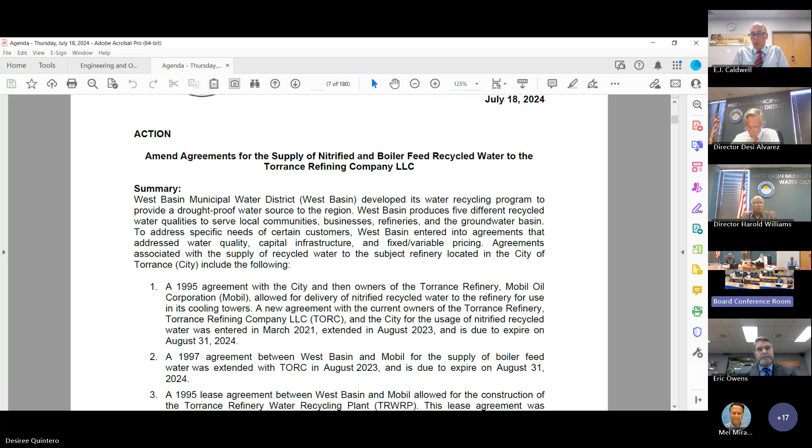So then we will move on to our second item on the action calendar, which is the amendment to the agreements for the supply of nitrified and boiler feed recycled water to the Torrance Refining Company. Mr. General Manager. Yes, thank you very much, Mr. Chairman. This item does begin on packet page 7. As you just mentioned, it is related to the nitrified and boiler feed recycled water agreements with the Torrance Refining Company. And for this presentation, we do have Mark Messerlian, our Executive Manager of Engineering and Operations.

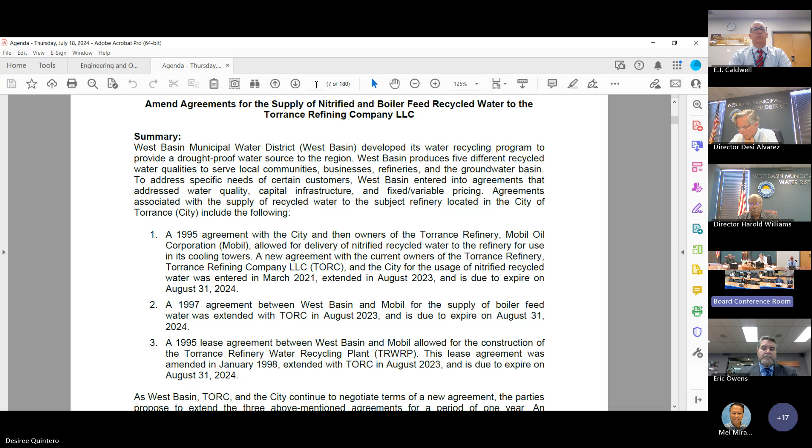Thank you, EJ. Good afternoon, directors. The development of West Basin's recycled water program required West Basin to enter into agreements with its refinery customers. Such agreements address water quality, capital expenditure, fixed and variable pricing. The agreements associated with our supply of recycled water to the Torrance Refinery are summarized on packet page 7, on the first page of the memo, under the summary. First, we have...

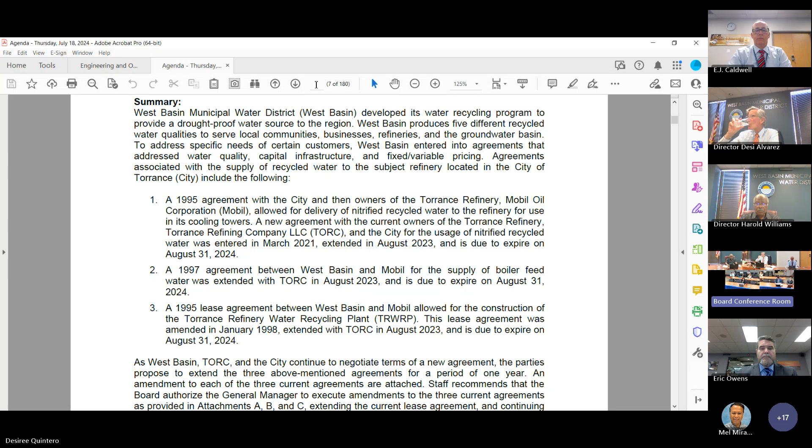the original agreement of 1995 for the supply of nitrified recycled water to the Torrance Refinery. That agreement ended in 2020. We entered into a new agreement in March 2021 for the supply of recycled water, and that agreement was extended this time last year for a period of 12 months. Secondly, there's a 1997 agreement for the supply of boiler feed water. That agreement was extended again last year for a period of 12 months.

Third, a 1995 lease agreement that allowed West Basin to construct water treatment infrastructure on refinery land and allows us to operate that water treatment plant today. That 1995 lease agreement was amended in '98 to account for the boiler feed facilities, and then last year it was extended for a period of 12 months. So all three agreements were extended for a period of 12 months last year.

You may recall last year that the city at that time planned, and continues to plan, to add pricing provisions in any long-term agreement we might have, but they plan on doing so for any agreement that goes beyond August of next year, August 2025. And therefore, there is an understanding amongst the parties that another one-year extension agreement will be necessary to get us to that point, while it also gives us the opportunity to continue good faith negotiations with the parties on a new supply agreement that will allow full recovery of its supply costs.

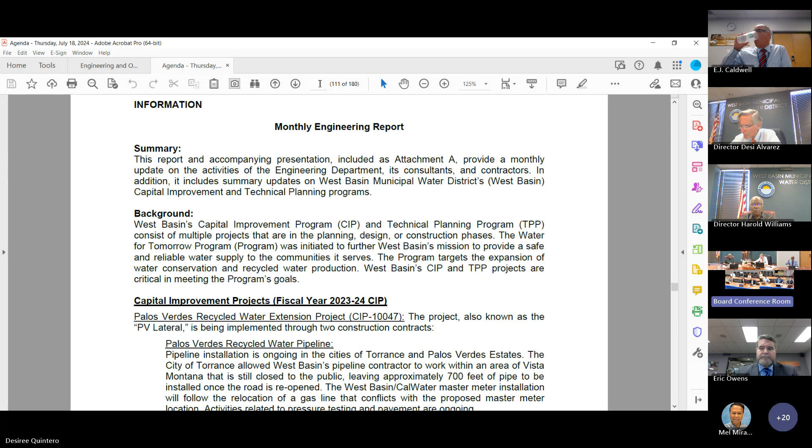As a reminder, at the end of the report in the agenda, you can also find project budget information and a list of open contracts for the engineering department, in case we ever have questions about those.

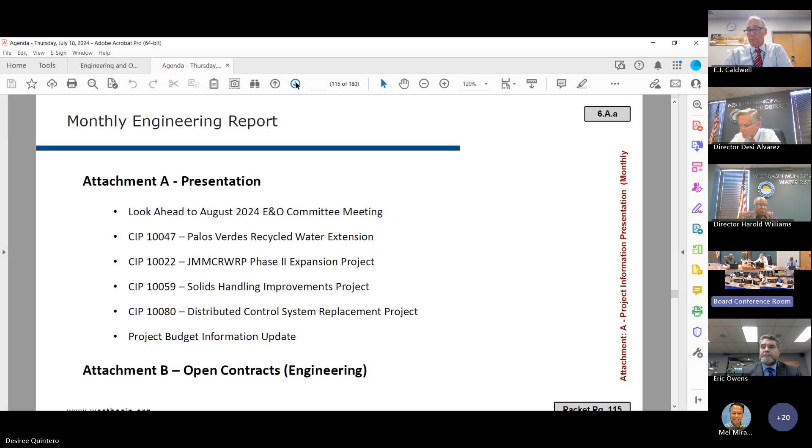This is a heads up on some items coming to committee from the engineering department. We anticipate requesting to pre-procure some key components of the solid handling facility improvement project, as well as requesting board approval to post the request for bids for the construction part of the project. John will talk more about this project.

In recent days, after we posted the agenda, we received word that another item could be coming next month. The city of Carson informed us that the agreement with the Carson Reclamation Authority for the new development just south of the 405 - the boulevards at South Bay, or the district at South Bay - a developer project that will install 5,000 feet of new recycled water piping, is moving along, and we could possibly bring it next month. I apologize it's not on the board, but it's recent news that it seems to be moving forward. Any questions about those? Otherwise we'll move along.

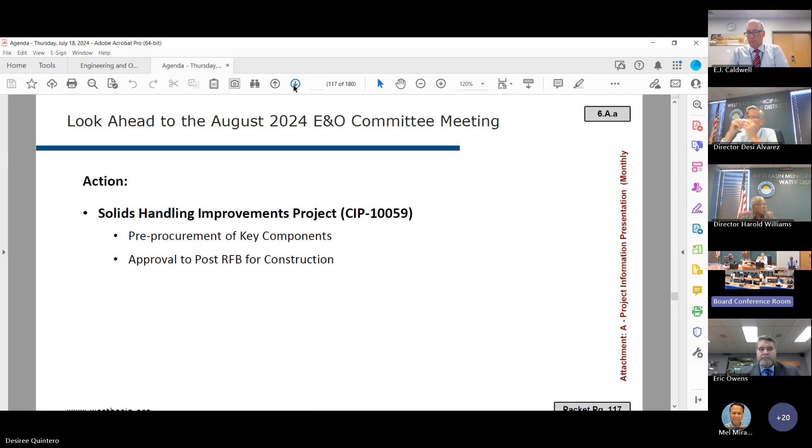Veronica, excuse me for interrupting, but could you speak up a little bit? Okay, yeah, I can do that for sure.

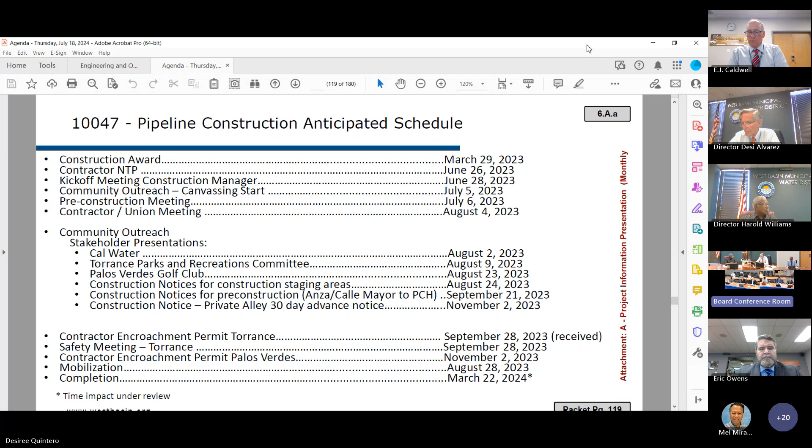So yes, we're in the process of assessing the submittals the contractor has sent us for the time extension. There's back and forth in regards to responses and modifications, so we're in the process of doing that. Hopefully next time we'll have a better, updated spreadsheet. But as you'll see on a future slide, we're almost done with the installation of the pipeline. If you can please follow me to the next page.

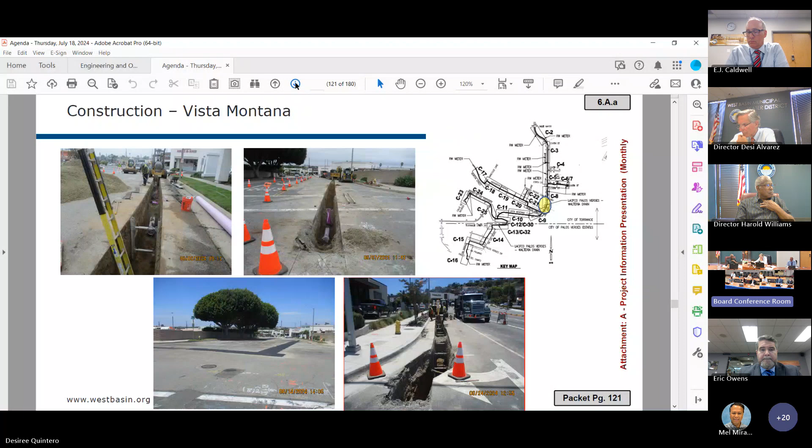Into the next page. This is a section that was actually closed by the city. Working with the city, they allowed us to work in the area where their contractor was working, and we were able to finish that area already. So this whole segment has been completed.

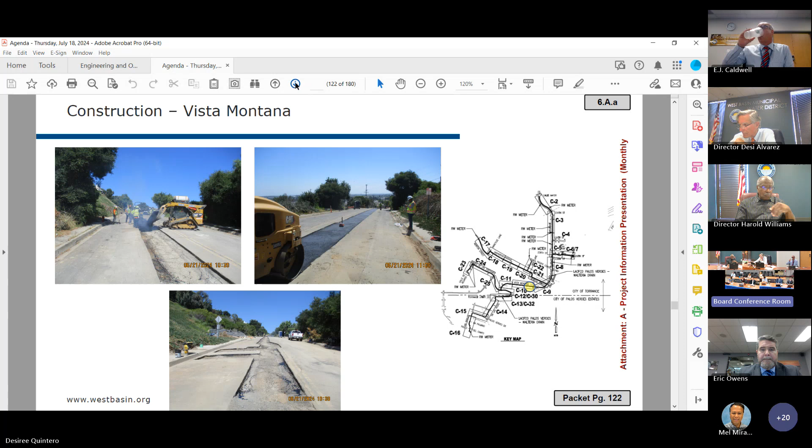The next page is just an illustration of the pipeline on the intake and discharge lines that are going into the pump station on 238th Street in the city of Torrance. Next page.

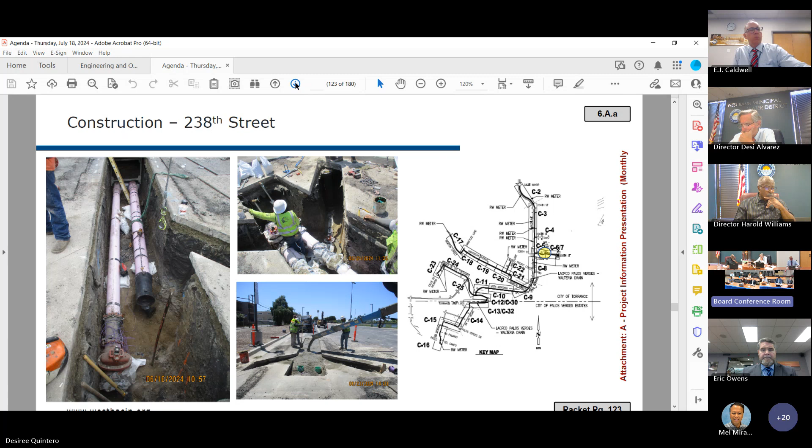So that's where the tie-in is going to take place. Right now we're coordinating with the operations department and the contractor to get the tie-in done in the upcoming couple of weeks, as well as another area on Vista Montana that the contractor is currently installing. By the next meeting, that whole pipeline alignment will essentially be completed.

The other component is the master meter that is in the process of being installed. As you might recall, we had a 2-inch gas line that had to be relocated, so we have to work our activities around that particular task. Right now there are also construction activities going into pressure testing, pavement, slurry seal, striping, and completeness punch list items. So this is for the pipeline installation.

Next page, please. This is the representation of the PLA status based on the pipeline. We are basically meeting goals. On the local, it says 18.8%, but that represents tier 1. Tier 1 is basically everything that is in the service area and a 25 radius from headquarters.

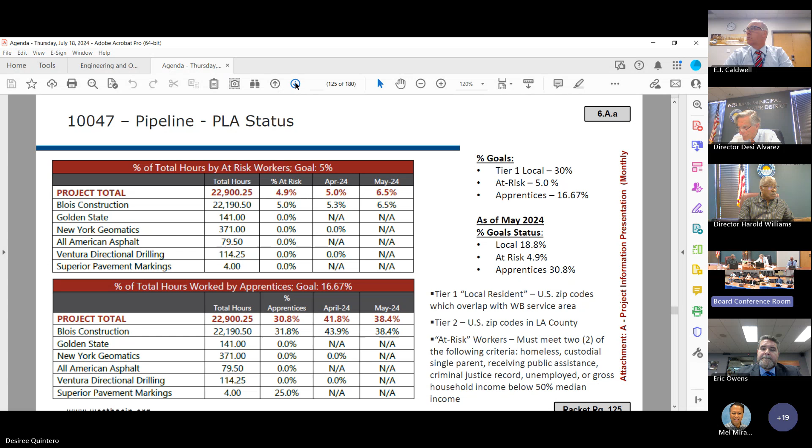Tier 2 is also local, but extends beyond the radius of the 25 miles. It's always known that it's sometimes challenging to meet all those criteria, but I think we are doing our best and we're meeting those criteria.

Into the next page. Again, this is just a summary of the local tier 1 and tier 2 per division, summarizing participation and all the contractors that are contributing to that. Next page.

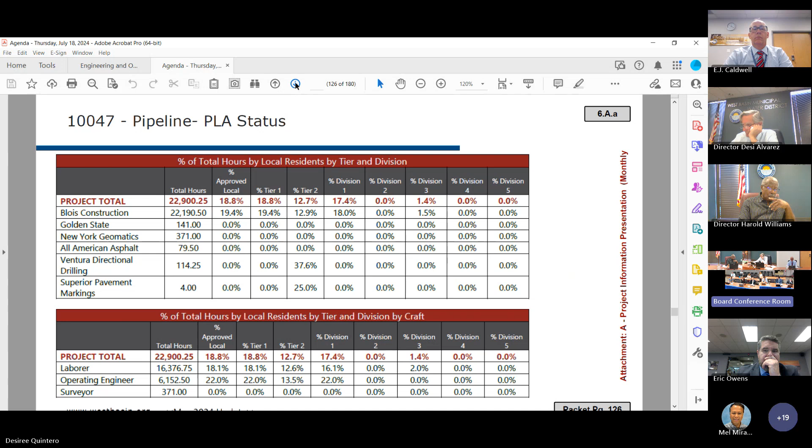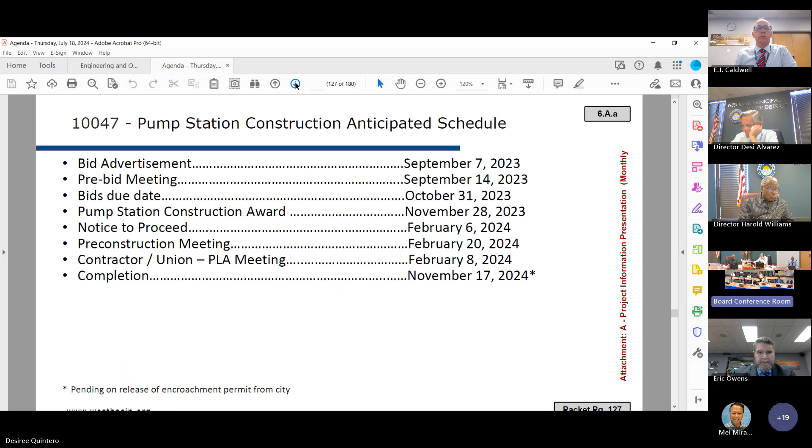So, pump station. Again, you've seen this particular slide, and we're happy to say that we finally got all the permits released, and they were picked up yesterday. Right now we're in the process of coordinating with the contractor for mobilization. This slide will probably be modified to represent dates with all the updates that we have.

Next page. Again, similar to the pipeline, this is just a summary of the activities that are ongoing. The submittals for those major long lead items have already been prioritized, so the contractor has already submitted those and they are in the process of procuring equipment.

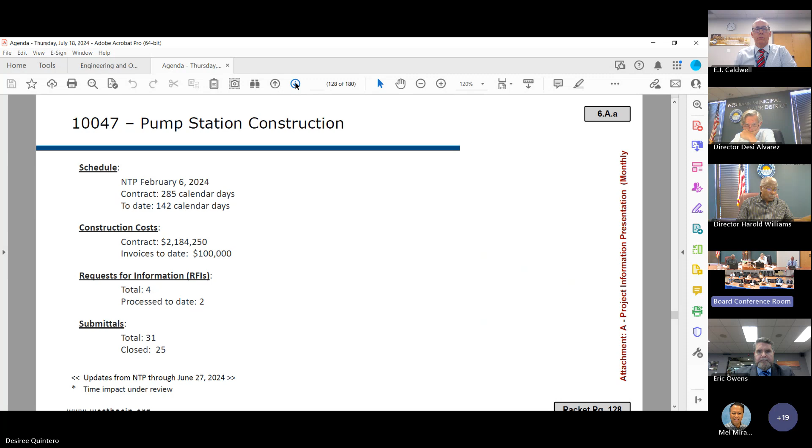Because there hasn't been much construction except for mobilization activities like bonding and setting up areas, there haven't been many invoices except for one. To next page.

Any questions? Not right now, thank you.

It's worth noting that we will be providing an update to the city of Palos Verdes Estates next week at the council meeting.

No, I have a question. Going back to the schedule. On the pipeline, we're 97 days over now. What is your best guesstimate of when it's going to be done?

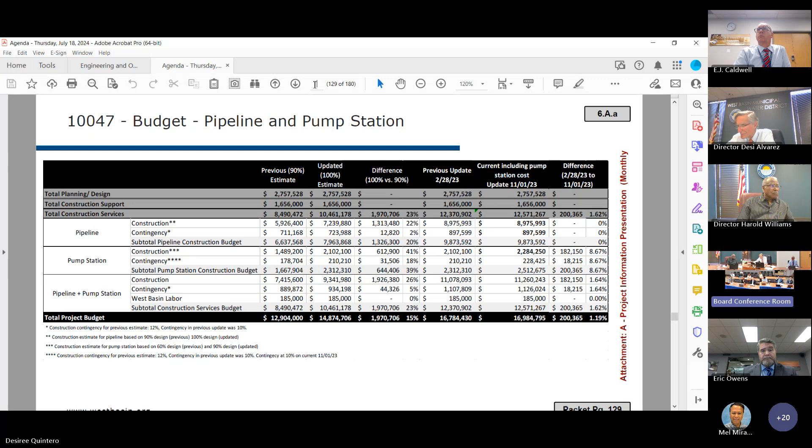Okay, let me see if I understood your question. You're asking when the pipeline is going to be finished? Yeah. Okay, so right now they're basically almost done with the installation of the pipeline, and then the remaining item will just be the master meter.

It seems like, by August, the end of August, they will basically be done. There might be some cleanup still, like follow-up, in September. The actual pipeline work will be finished in August, yes.

So another 45 days? So the pipeline right now, if maybe you can go back maybe 4 slides before, I think it's page, let's see. I hit 24. Yes, 124.

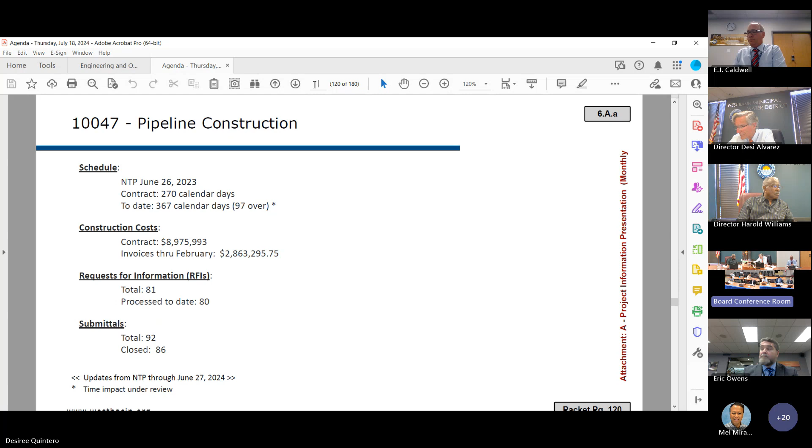Yes, they already have a couple of little areas. So in regards to pipeline installation, the only segment remaining is because the road was closed and the contractor had to wait for the city to open Montana Avenue.

The other segment in the process of being installed is just the tie-in. The pipeline is already installed. All they have to do is basically do the connection from the new pipeline to the existing recycled water system, which is at Anza and Calle Mayor. For that, the contractor has already pressure tested the segment between Calle Mayor and the pump station, all the way to the intake, and that has already been tested and passed.

So the contractor is planning on that tie-in in the next couple of weeks. That's what we're coordinating, and again, that will be completed by next week.

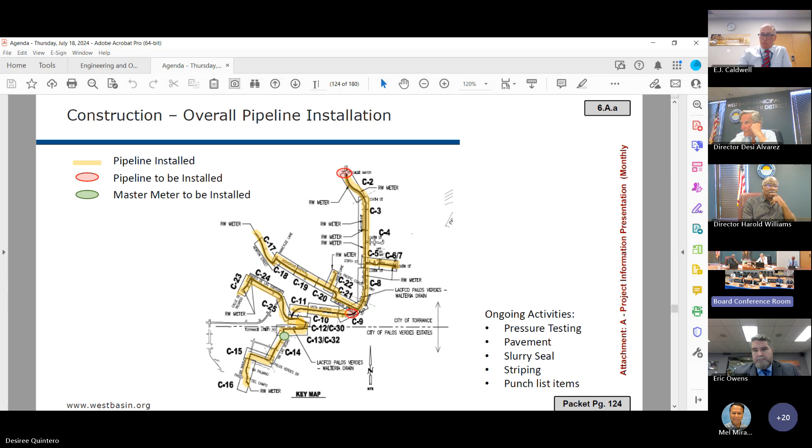Next up is Mr. Kevin Cullen on the phase 2 expansion project. Thanks, Marquette. Good afternoon, directors. I'll be starting on packet page 130, or actually 131. Here are some example photos of the CEMF skids.

This is skid one, the finished product of what we'll hopefully be turning online and producing new microfiltration effluent through in the coming months.

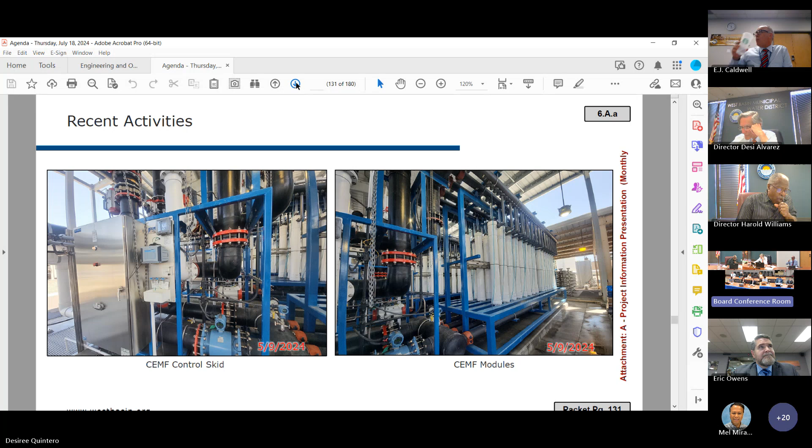The contractor has continued working on their base scope of work to integrate all of the plant improvements as part of the phase 2 expansion into our existing control system. The focus has been their internal loop checks, which have taken a lot longer than expected. The district has had to remain very flexible, working with them to allow testing within an active treatment plant. We're continuing to work with them each day to be partners and get to the end as quick as possible.

Right now they're about 75% done with their internal loop checks. We're hoping they'll be done in the next week or two, and we can witness their loop checks before we start the 30-day test.

One issue we're currently working through is what they're calling a latency issue, essentially a delay in communication from the PLC to the DCS, which we do not have on our existing plant infrastructure. It's an internal problem local to their control system, about a 2-minute delay in communication.

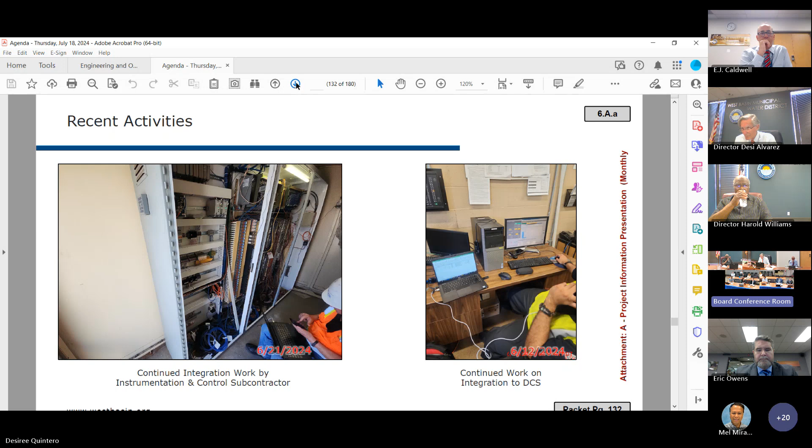Our requirements for the project are real-time control, so that's our expectation, and we're going to work with them over the next week or two to come up with a fix. That's our focus right now.

Here's an overview of the commissioning process we've been in for quite some time. We're still in phase 4. We've completed the final MF sequence testing and are in the midst of DCS integration. All of the tags, roughly 2,000 across the entire project, have been brought into the DCS, and they're in the loop check process, about 75% done.

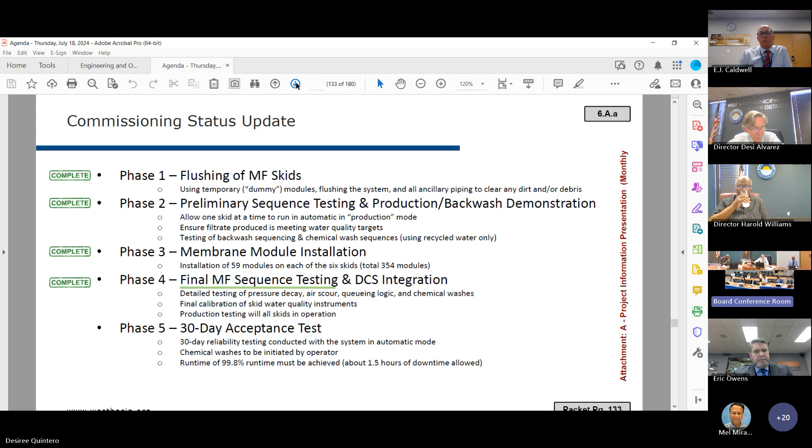Following that, we'll witness their loop checks. That's a 2-week process, and then we enter the 30-day acceptance test, which will bring us to completion of the project.

Here's a remaining activities list, what's required for the 30-day acceptance test, which we're hopeful will start in the coming weeks, and other items required for final completion, some administrative, but also some functional testing of the control logic currently being installed. That concludes my update, and I'd be happy to take any questions.

So this is the project that never ends, but is it going to end in August? I could say confidently it's not going to end in August. All right, I'll move on. Thank you.

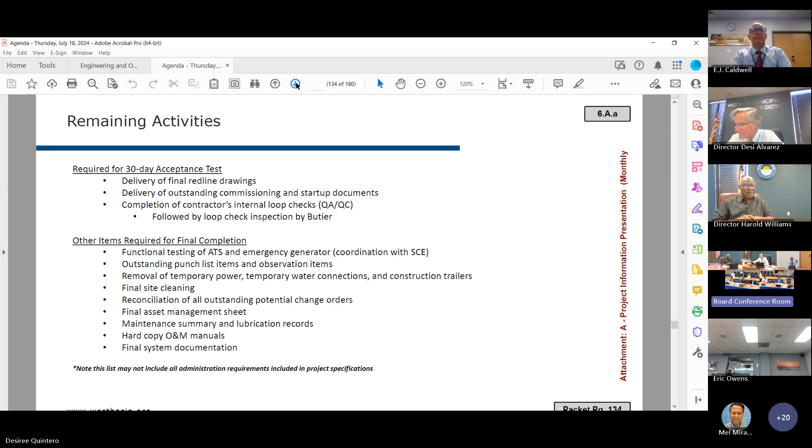Let's move on. Next up is John Benner for the Solids Handling Improvement Project, DCS. Thanks, Barker. Good afternoon, directors. We'll start the Solids Handling Improvements Project on packet 136.

This shows the overall schedule of the design phase we're currently in. The items in green are general coordination and project admin that's been ongoing throughout. The condition assessment was finished at the end of last year. The preliminary design report was finished at the beginning of this year, and currently we're working through the pre-procurement list, bringing back recommended awards for some pre-procured items next month.

On the design side, we have the 90% design submittal. We're currently working through constructability review, and then we'll move on to the 100% design. As part of the design submittal, the Arcadis design consultant is developing project phasing, planning and scheduling, which is key to this project since the process needs to operate 24/7. We're bringing in temporary dewatering systems to handle dewatering while construction is underway.

Finally, task 7 will be the engineering support during construction. Once we get into the construction phase, Arcadis will support the review of RFIs and submittals, and hopefully not, but potentially change orders, assisting us with that work.

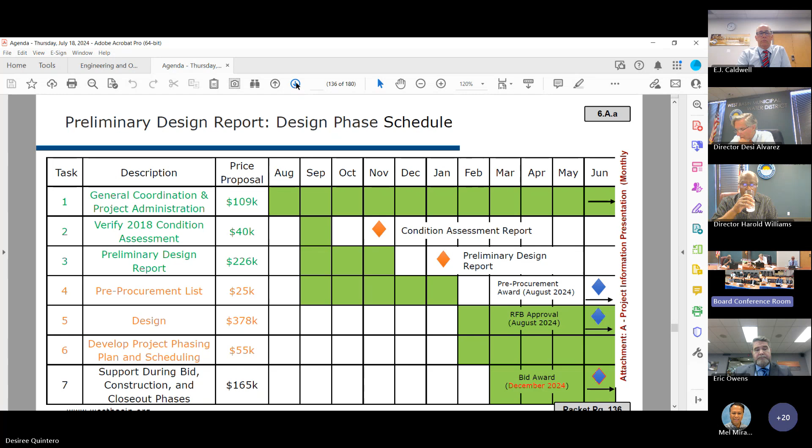We aim to bring some of the pre-procurement awards next month, as well as the approval to post bids for construction. We're hoping for an award for construction in December, and that's at the bottom of that.

Next slide, please. So these are the next steps on this project. We aim to undertake the constructability reviews with the construction manager. The initial 90% review was held on July 12th.

That was with the construction manager, West Basin staff, and Veolia. We are currently compiling comments from that, which we'll submit to the design consultant, and then hold a second constructability review with the construction manager, West Basin staff, and the design consultant in the next couple of weeks.

Once we've submitted our comments back to the design consultant and they continue working on the 100% design, we'll conduct the 100% design constructability review once that's submitted. We're expecting that sometime in September.

We currently have one IFQ out, but another will probably go out next week for pre-procurement. If you remember, I brought those before the board for approval to post back in May. So we currently have the sludge conditioning

posted, and the temporary dewatering system rental will be posted next week, or possibly the week after the approvals. We'll review the quotes over the next couple of months, and bring those quotes and recommended awards back in either August or September, depending on how long the procurement process takes.

For that temporary dewatering system pre-rental agreement, the sludge conditioning tanks pre-procurement award, pre-procurement of some electrical breakers for the temporary system, and then, as I mentioned, approval to post and present bids for construction to be next month.

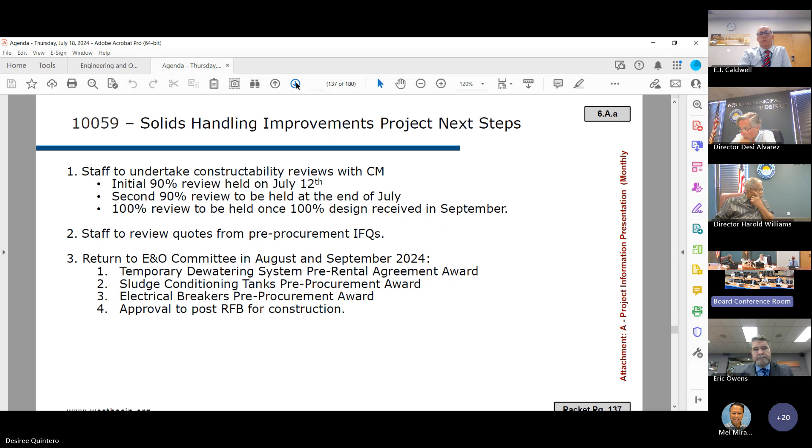Skip. That concludes the project presentation. You may notice, oh, sorry, we're skipping DCS. Are we skipping? I'm sorry? Move on to DCS project.

So for the DCS update, if you look on the packet page 139. As you will remember, we have in the last few months gone through the process of the RFP process for an owner's advisor.

We've presented that recommendation of Arcadis to the June Engineering Operations Committee, and we will be returning with that recommendation, with some edits to the agreement, in the E&O committee on Monday of the July board meeting.

Regarding the design builder procurement, we're currently doing outreach still. We've been doing that for many months now, meeting consultants regularly and walking them through the site so they're ready for when the RFP comes out.

The RFP template is completed and ready for the owner's advisor to come on board and finish it. The contract is about 90% completed, is currently going through a review with our district counsel, and then the owner's advisor will come on board and complete that.

And the scope of work development is currently at about 30% stage, and we're leaving that for the owner's advisor to take through due to their technical knowledge.

The aim is, once the owner's advisor comes on board, to present them with a 75% done document package for the procurement. As I said, we'll have the RFP 95% done, contract 90% done, and the scope of work 30% done.

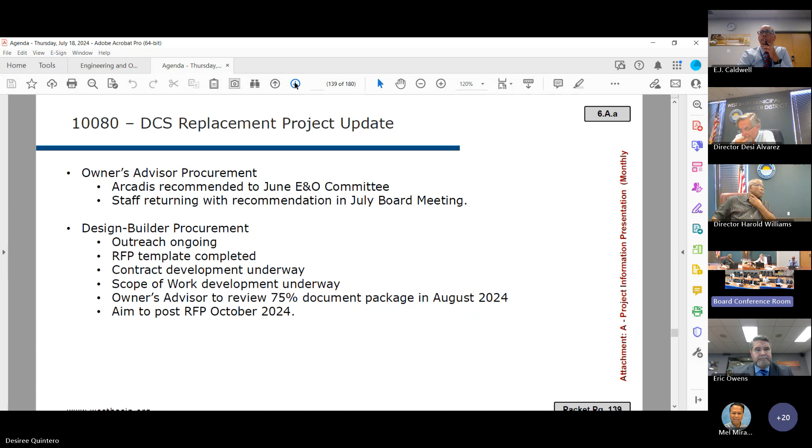As I mentioned, we're aiming to onboard the owner's advisor in August. It will likely come before this committee and the board in January next year to approve the award for the design build team. If we post in October, it'll be a couple of months of procurement for that project. It's quite a large contract, and then we're going to bring it back before the board, this committee and the board in January. Fall of next year, the aim is to complete the first phase of this project, the pre-construction phase.

That concludes the DCS update. Any questions? No? Thank you. Okay, so we'll move on.

Next item up is operations. Yes, Mr. Chairman, that is the next item. Before we move on, I did want to just point out one thing.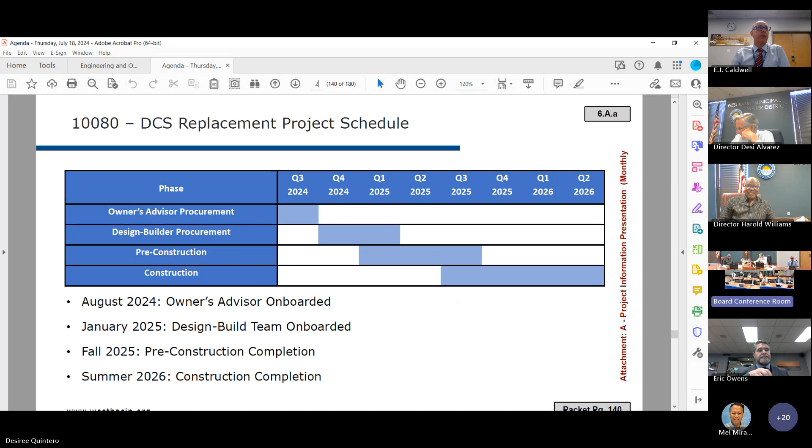You did ask about the JMM expansion too. And while I do completely agree with Kevin's viewpoint that it will not be completed by the end of August, I did want to note that is not in part or all involved with Kevin's performance, because we would not be where we are without that effort to get us across the finish line. So I wanted to note that it will not be completed by the end of August, but we're doing everything that we can to get it done as soon as possible.

Thank you. So the next item that we have is item 6B, a monthly operations report. This begins on packet page 148. And similarly, we have an excellent team here to present to you. This will be led off by Uzi Daniel, Manager of Operations, Susanna Lee, Operations Supervisor, Jamie Malpe, Water Quality and Environmental Compliance Supervisor, and Frank Dukes, our Operations Supervisor.

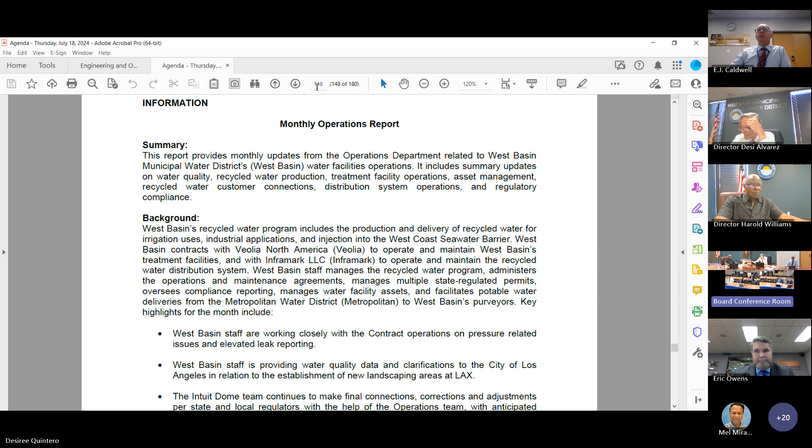Thank you, EJ. Good afternoon, directors. Hopefully you can hear me. Voice has never been a loudness issue for me. I wanted to highlight a few things before we get into what is a slightly new format for our operations presentation, if you have time and would like to see that.

Some of the things that operations staff this past month has been dealing with is a lot of small but good customer service, recycle water customer service oriented things, from pressure concerns to connections. The Intuit Dome thing, again, a really great success, but we're still working with that, getting it across the finish line. They had their first soft event and their next one is coming. I think Frank will highlight this at the end of the month.

In addition, we've had a few folks asking about water quality and a number of general public just inquiring, I think, as a result of some of our really great classes that we've held.

We're also dealing this last month, operations has worked, the board knows we worked very hard to sometimes secure two vendor suppliers for things that were very critical, so we wouldn't get in a situation where one had an issue. There are some consolidations occurring. Our solids hauling, one team bought the other team. So staff will update, currently working on that.

In addition, with chemical, we're finding that a lot of folks no longer want to sign our terms and conditions. Asking around, it seems to be a bit of an issue with other agencies as well. So again, we're working hard to manage that and make sure the chemicals we need do arrive to the facility. Thank you to staff for that.

On some nice positive notes, upcoming, AWWA and CWEA have gotten together. The Advanced Water Treatment course will be hosted next week or the week after at ECL. You're welcome to stop by with some instructors. People from all different agencies and groups will be coming down to attend that 4-day class. Take advantage. They really seek out our site because it is sort of a pioneering site.

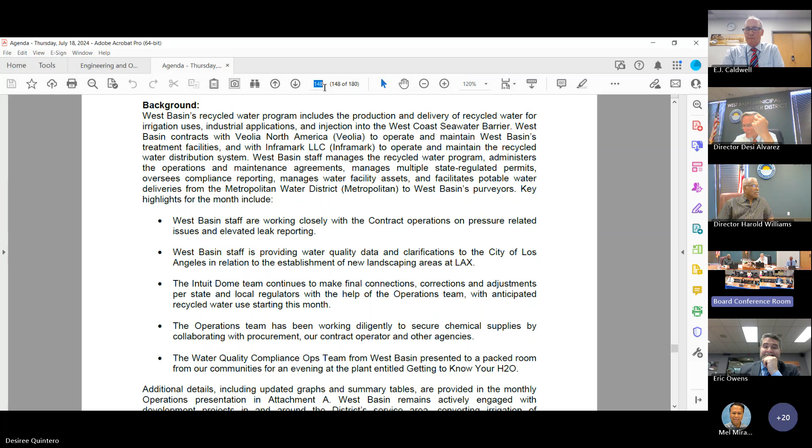And with that, we'll go to page, if you'd like to see the presentation. If time permits, we'll go to packet page 154. So this is a little bit of the new format, as you'll see, so you might see a few speakers who have alternated a bit, but we'll proceed in that order and update you with the slides and any questions you might have. Thank you.

Good afternoon, Director. We'll begin with the production section, focusing on production and demands. For the month of June, we ended a little bit below last fiscal year. For the year, we ended at 27,000 acre foot versus our budget of 33,000.

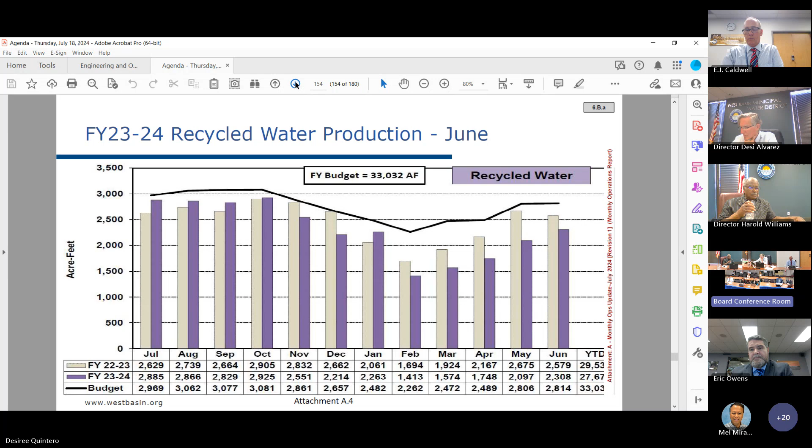We can scroll to the next page, we can see the contributors. Mainly that barrier, we are still severely different from our budget, and that's mainly because of the MF membranes, and we're still working through a lot of the valve issues and compressors and whatnot. We're anticipating this fiscal year that we will be meeting the target or budget amount. Overall for the year, we're down 17% compared to the budget. The other significant variance is JMM Nitrify, where I mentioned numerous times that they rebalance the flow and want to take more boiler feed versus the Nitrify.

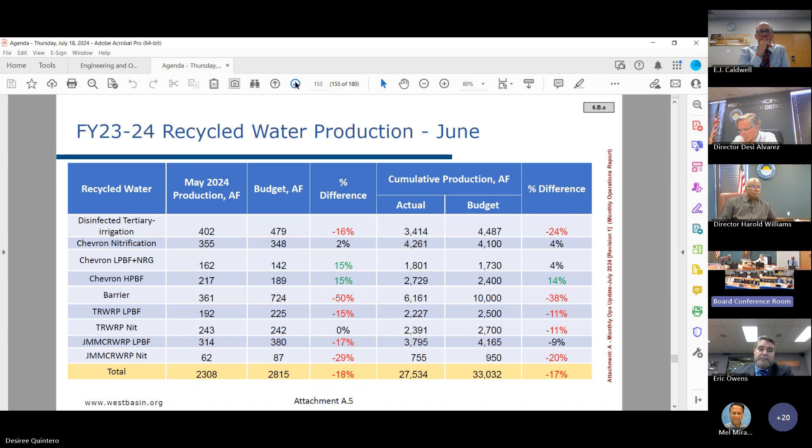Moving on to the next page. Again, this is really to highlight the difference compared to last year, and it's mainly barrier production that contributes to the difference between budget and actual. Next page, please.

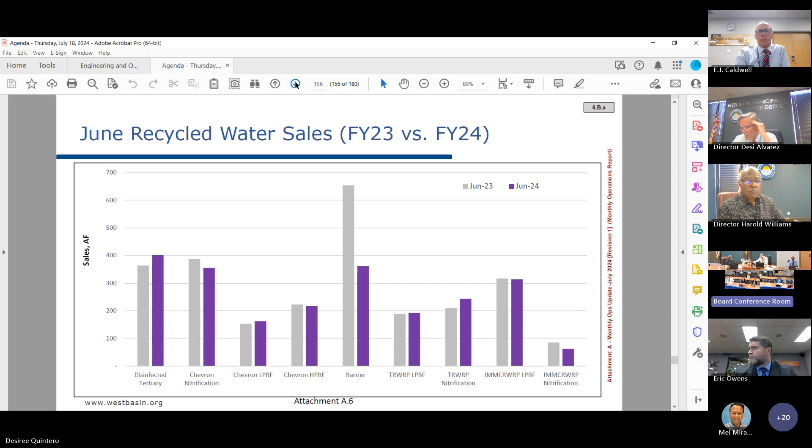So this is to couple with the recent VFD project that Kevin finished. We're looking forward to utilizing some of those VFD pumps back in service. With that, I think that's the last part for production. Any questions? Move on to water quality compliance.

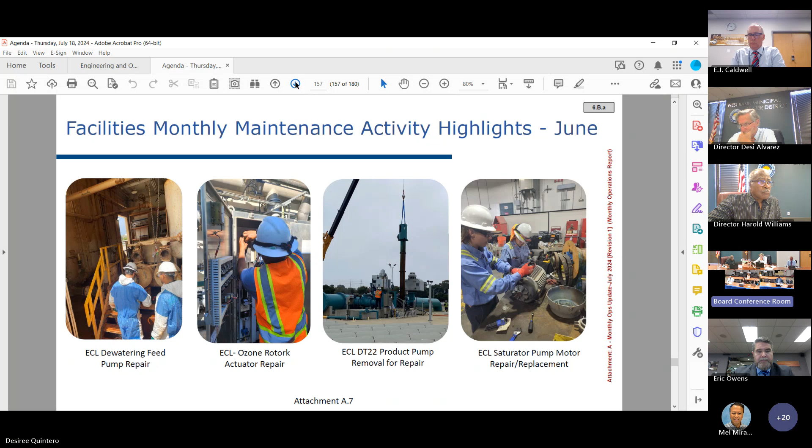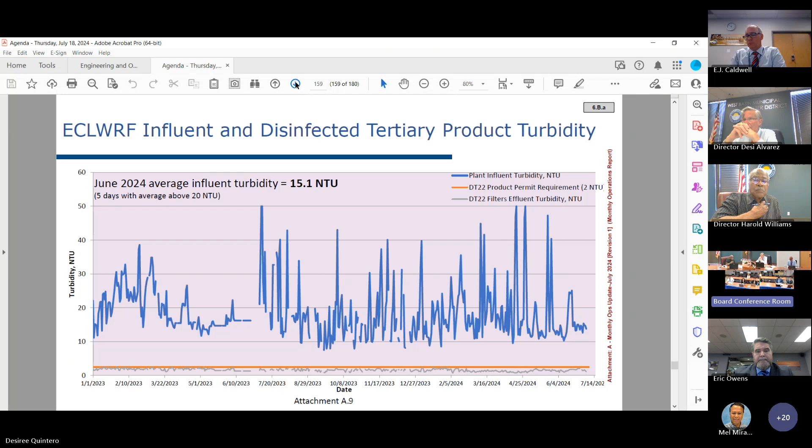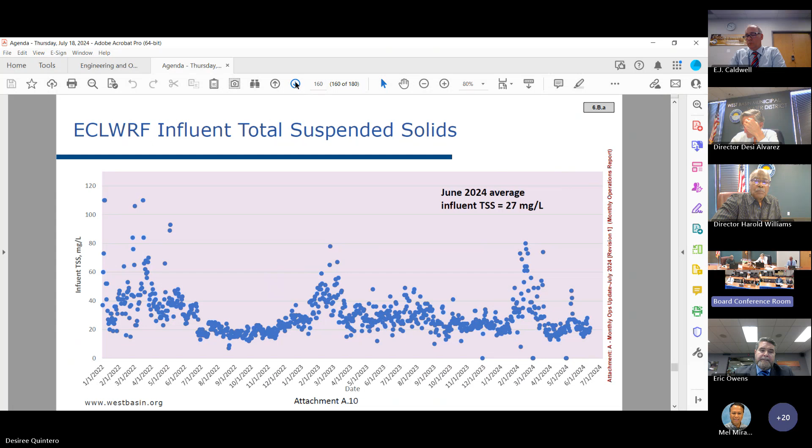It shows the influent total suspended solids, which averages about 27 milligrams per liter for the month of June. Next slide, please. This table shows the difference between Hyperion effluent versus ECL influent on the monthly average of TSS. We are below the monthly average limit. Looks like Hyperion is a little higher than ours.

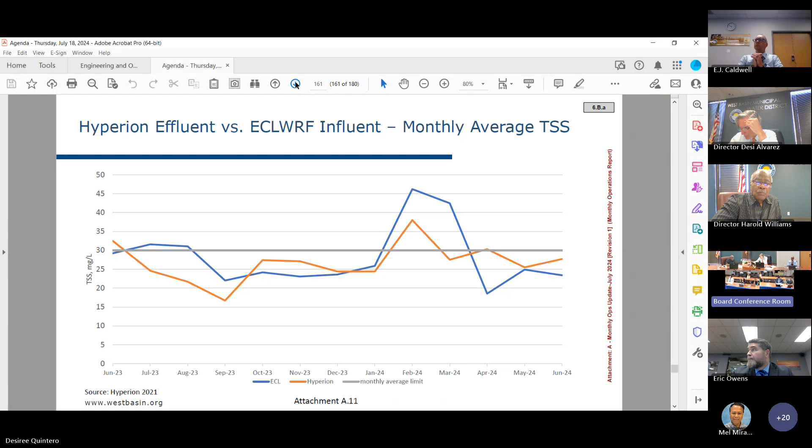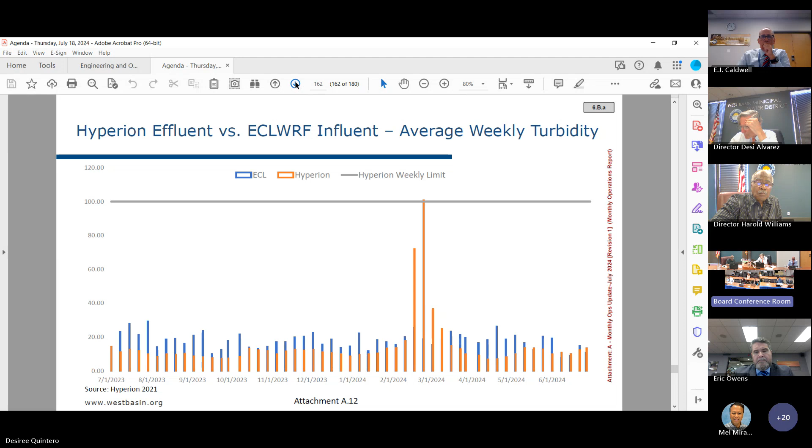Next slide, please. This one shows the Hyperion effluent versus ECL influent, the average weekly turbidity. And once again, it looks like their turbidity is a little bit higher than ours. Next slide, please.

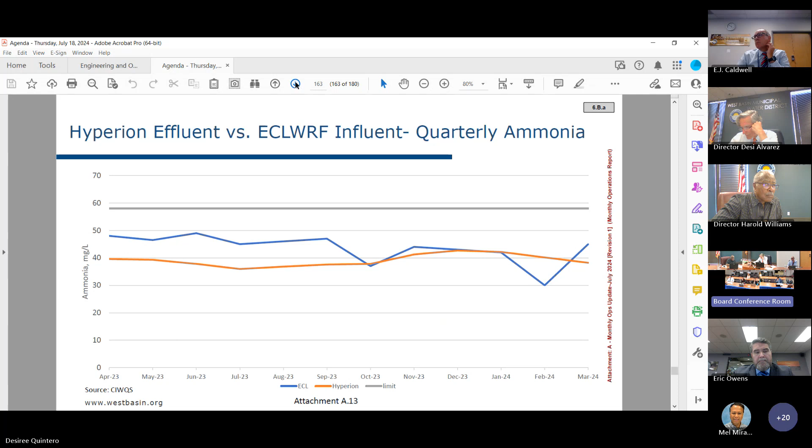This shows the Hyperion effluent versus the ECL influent quarterly ammonia, and it seems to be reversed - we're a little bit worse than that. Next slide, please.

Environmental compliance activities for June. We have our routine monthly log reduction value report. We also completed some of the requirements for the renewal of the Carson Brine permit, which included a spill cleanup contingency plan, a technical report on preventative and contingency plans, and an initial investigative toxicity reduction evaluation. We collected 653 compliance samples for the month of June. Coming up, our RFPs in the near future will be for the chemistry lab and toxicity laboratory, which contracts will be expiring at the end of the year. With that, I'll pass that over to Frank.

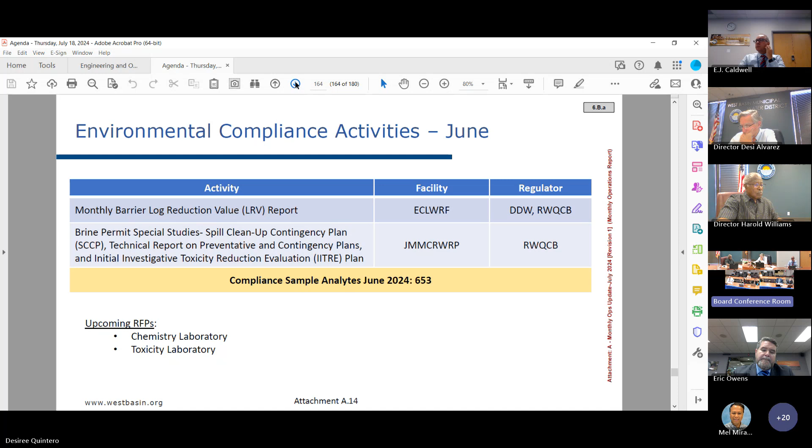This is our monthly distribution system update, starting with the distribution system activities implemented by our operator Inframark. Here you can see the table of all the monthly activities.

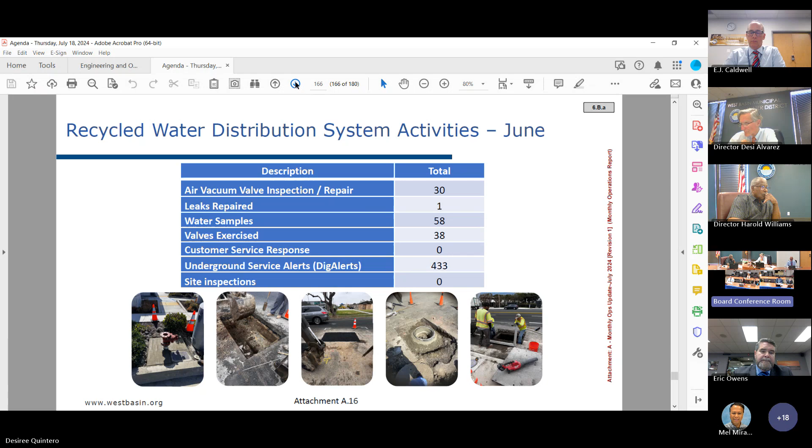I wanted to highlight that in June we had one leak in our distribution system from a service line in Gardena, in front of Arthur Lee Johnson Memorial Park, and that was repaired with no issues. Currently this month we've had a total of 3 leaks so far, 2 in El Segundo and 1 in Hermosa Beach, also from service lines. Those have been repaired also with no issues. Next slide, please.

I'm happy to report that we have another new recycled water site connected. This is a housing facility within the SoFi development. They're going to be using recycled water for irrigation of landscaping, between 1 to 2 acre feet per year. The cross connection test was completed at the end of June, and they were able to connect to recycled water soon after.

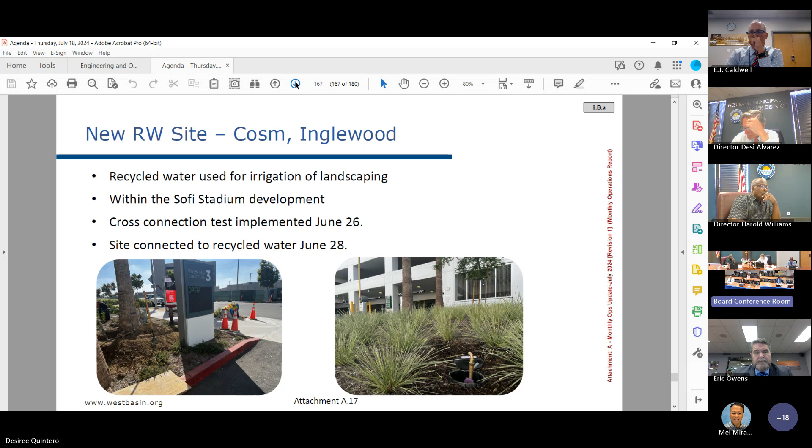Next slide. Talking about cross connection tests, I want to provide a brief overview of a cross connection test, just to provide a refresher of the work implemented as part of this test. Whenever I provide updates for every recycled water site before they're connected, a cross connection test is required. It's also required for sites that modify their existing recycled water system. A cross connection is basically an interconnection between the potable water system and the recycled water system, and even if there's a valve separating the two systems, that's still considered a cross connection.

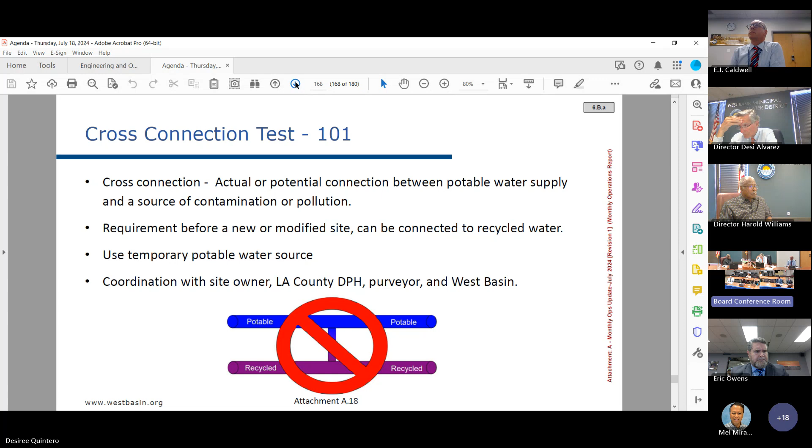Whenever we implement these tests, the water applied to the proposed recycled water system comes from a temporary potable water source from a fire hydrant. A backflow protection device is installed, and then a hose is run to the proposed recycled water system. We coordinate with the site owner, LA County Department of Public Health, and the purveyor for that area. Next slide.

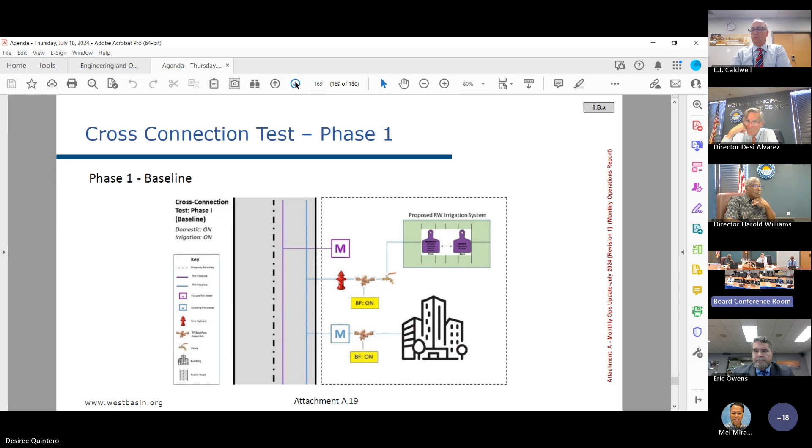I wanted to briefly go over a basic cross connection test for a site. This is an example of a site that's going to use recycled water for irrigation. We first start with the baseline test, where we pressurize both systems, the proposed recycled water system and the potable water system. In this example, the proposed recycled water system is irrigation, so the entire irrigation system is tested to ensure all the devices, all the sprinkler heads, and all quick couplers are working. For the building, all the bathrooms, sinks, and water-using devices are tested as well. Then we go to the next phase.

Next slide, please. We would turn off one of the systems, and in this example we're turning off the proposed recycled water. The entire test of all the fixtures is implemented again. The same inspectors that went through the irrigation system go through it again to make sure nothing is working. If something did turn on, that would be an indication of a cross connection. Similarly, for the building, all devices should not be working, and if one is, that's an indication of potential cross connection.

Then the final phase is the same test, but this time the proposed recycled water system is pressurized and the potable water is turned off. All the devices are tested again to ensure the system is pressurized and working, and similar to the building, there shouldn't be any devices working, for example a drinking fountain or something like that. Anyway, that's a summary of a cross connection test. Happy to answer any questions.

Yes, sir, typically how long does a test take? The complexity or duration of the test depends on the size of the site. This test is applicable to all proposed recycled water connections, but the duration and number of staff required are determined by the size of the site. We try to implement the test within a 1-day time frame, estimating the number of staff needed to go through the entire irrigation and building system. For the Intuit Dome, for example, the site was so large we had to split it up over 2 days, with a large amount of staff to implement that test.

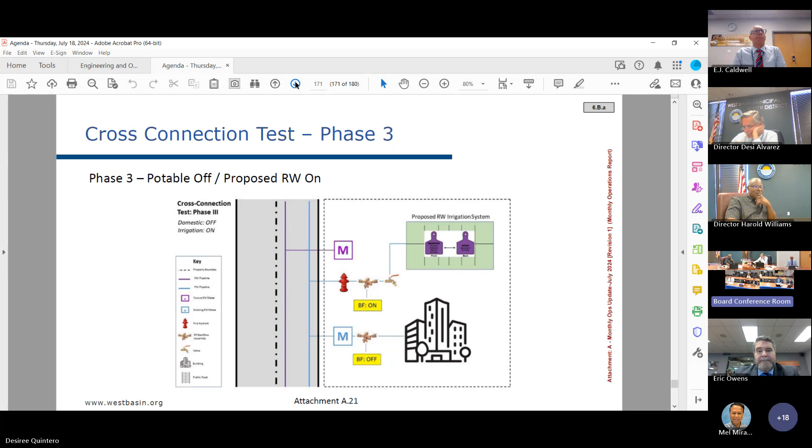Moving on to the next slide, please. This is our monthly potable water customer service report. There haven't been too many changes from the previous month.

For WB 23A, the agreement between West Basin and Golden State is still pending, so the advertising for bids schedule is still pending. But once that agreement is signed, Metropolitan Water District can schedule advertising for that work. For WB8, Metropolitan Water District is planning to replace a valve, which will require the city of Lomita to install 600 feet of pipeline for the emergency connection. The city is going to move forward with that work, but they haven't scheduled it yet.

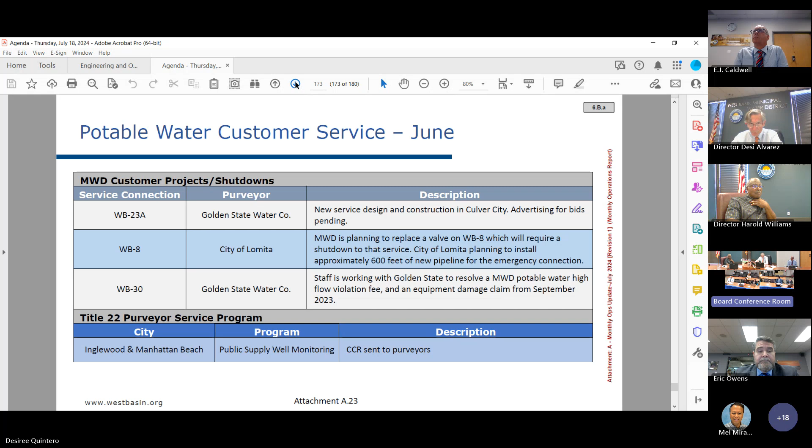Next slide, please. This is the potable water sales update for June. The actual sales for June were 7,603 acre feet compared to the budget of 8,128, a difference of 7%. For the total year, overall sales were 83,887 acre feet compared to the budget of 95,000 acre feet, a difference of 13%. Happy to answer any additional questions.

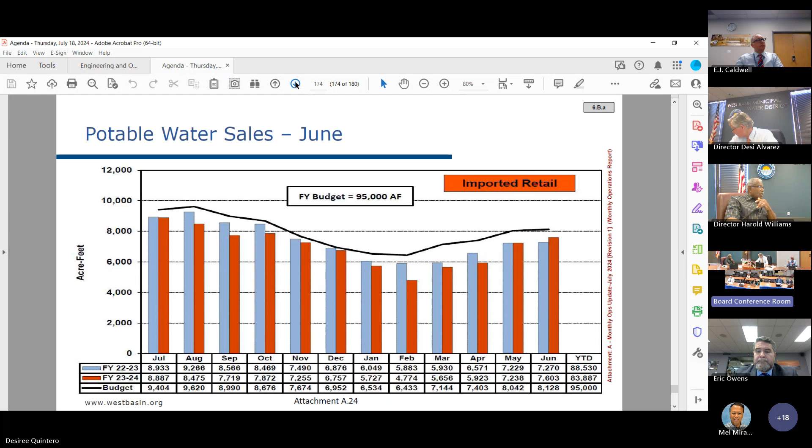Well, thank you. Very good. I think that brings us to the end of the information calendar. That is correct, so we don't have any closed session items. Correct. Are there any general comments or future agenda items you would like to bring forward, Director Williams?

Yeah, I have a question concerning the CIP projects and the CIP number. Is there any significance to the number of the CIP project? Yes, there is significance. It helps us track project documents, project costs, and make sure what we're spending is within budget. So tracking, monitoring the project, contracts, having a number for a single project helps us with project management and budgetary issues as well.

Were you asking regarding the specific number? So could you have a CIP project without a number? No. So in order to get a CIP project, you have to go through the numbering system? Correct. And who does that? The engineering department does that. Every year when we go through our budget process, once we see a request for a project, we validate that request. If there's merit to it, we assign a project number to it. We talk to finance so they can assign an activity code for it, and then we bring the project forward for the board's consideration before we proceed.